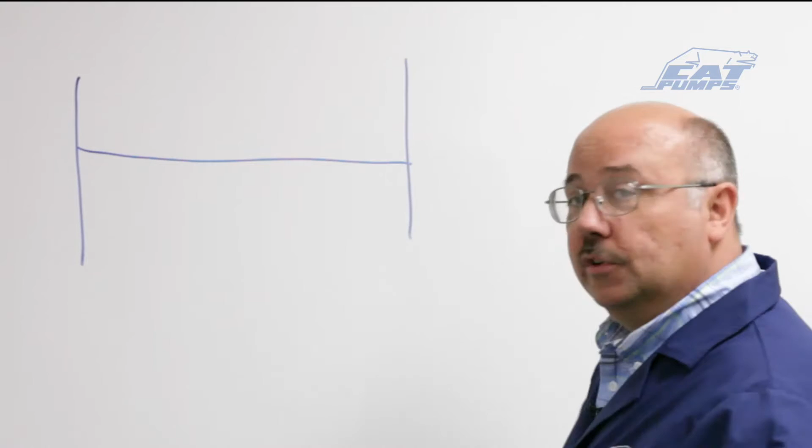Where do pulsations come from, and why do we need to dampen them? First, let's talk about where pulsations come from—they come from the nature of a triplex reciprocating pump. I'm going to draw a representation of one revolution of the pump crankshaft, going from 0 to 360 degrees, with 180 in the middle, marked every 60 degrees.

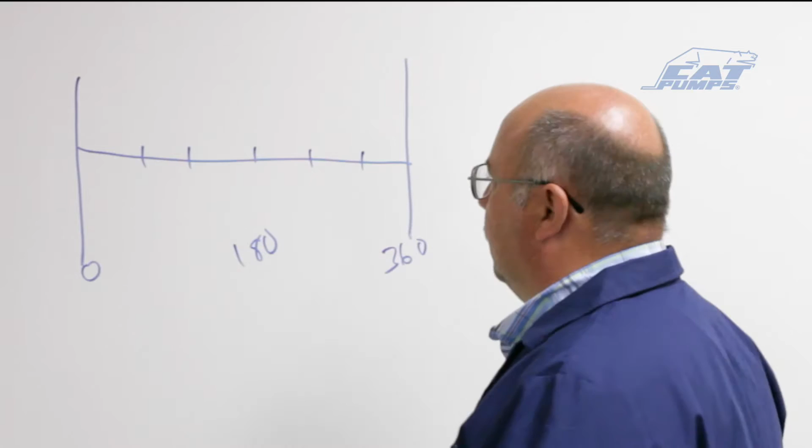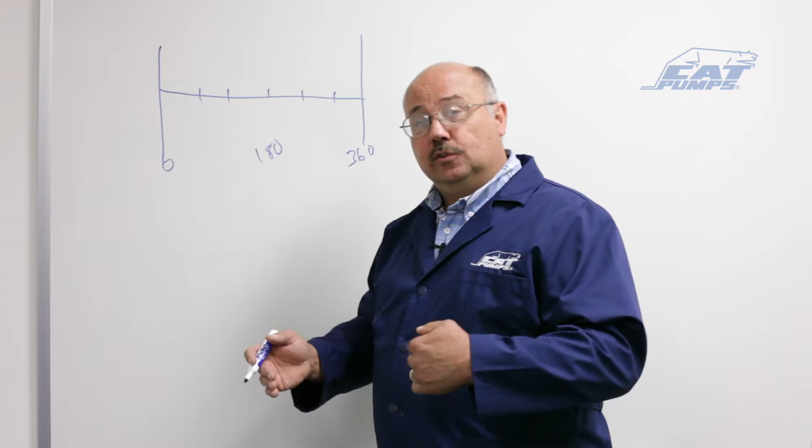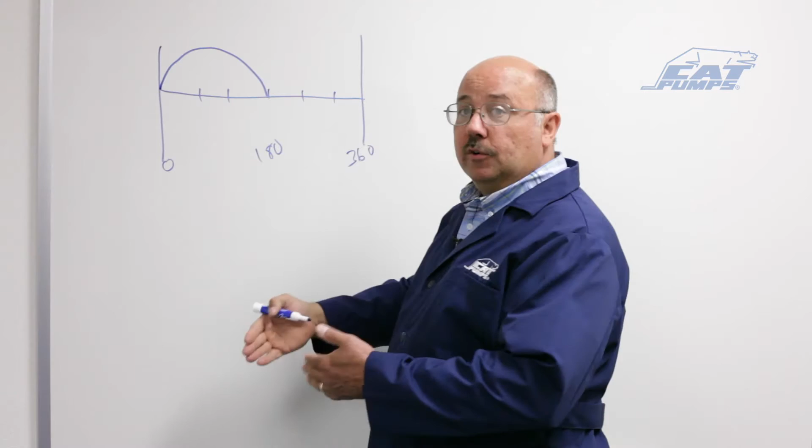Let's look at the first plunger. When a plunger starts out on a reciprocating pump, it's at 0 speed. Halfway through its forward stroke, it's at maximum speed, and at the end of its stroke, it's back at 0 speed. So the curve of the output will look like that. That's the forward part of the plunger—this is the return, where it's bringing fresh water into the chamber. We're only interested in the output of the pump in this scenario, so one plunger has output like that.

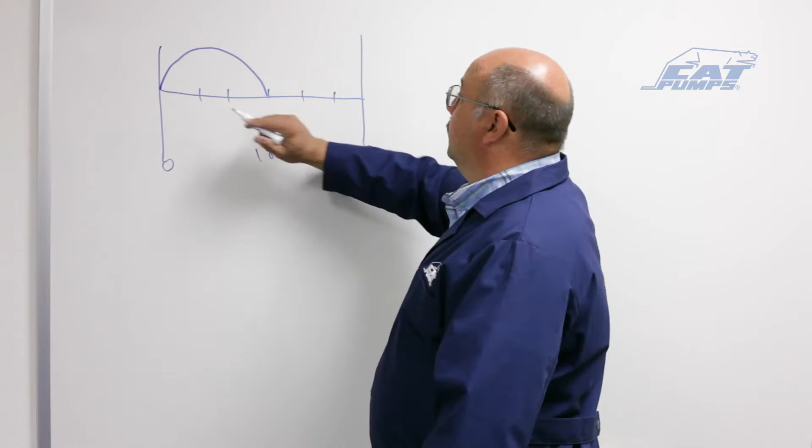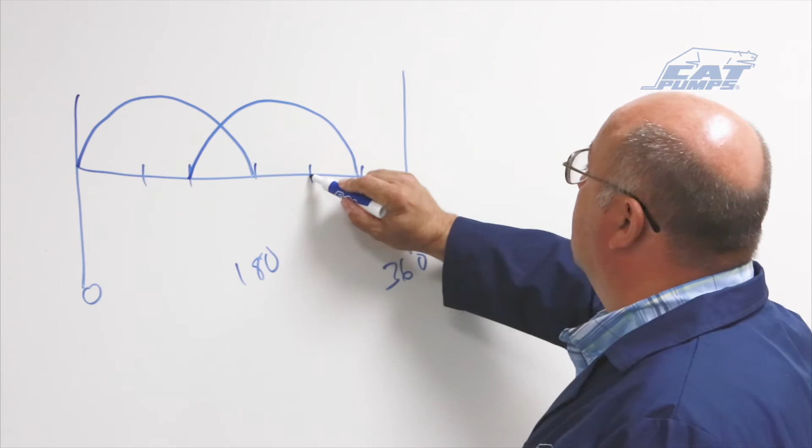Now let's look at the second plunger. It starts at 120 degrees offset and has a similar output. The third plunger starts 120 degrees after that, with a similar output as well. That's what the output of a reciprocating triplex pump looks like.

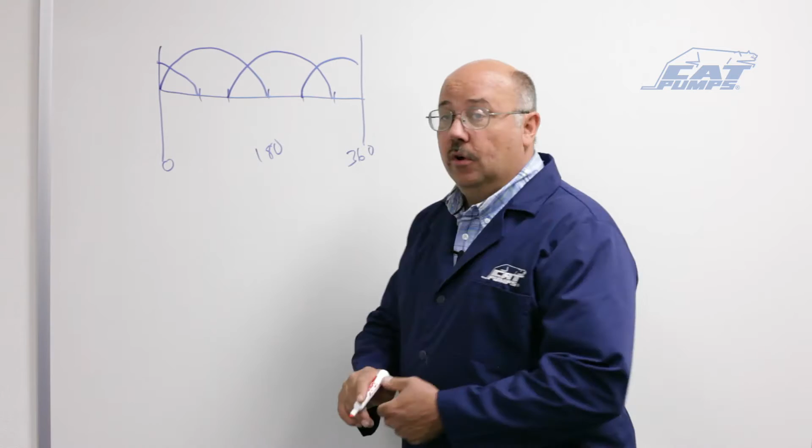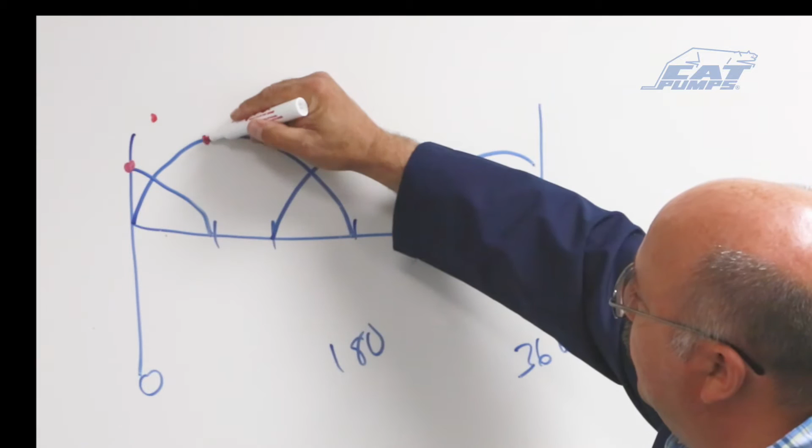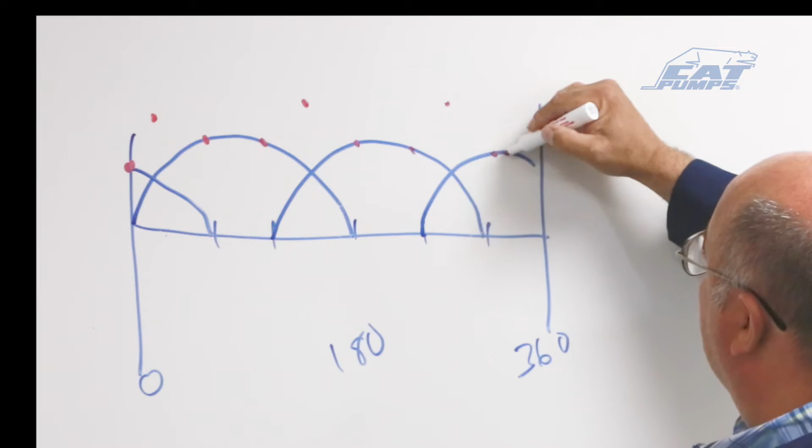Now, to get a true picture of what's happening, we add what's happening at each moment. At this point, only one plunger is going forward, so there's this output. At this point, two plungers are putting out the same amount, so we add those. Here, only one is putting out, so it follows this curve from there to there. Again here it adds, follows along, adds, and follows along—so the output of the pump actually looks like this.

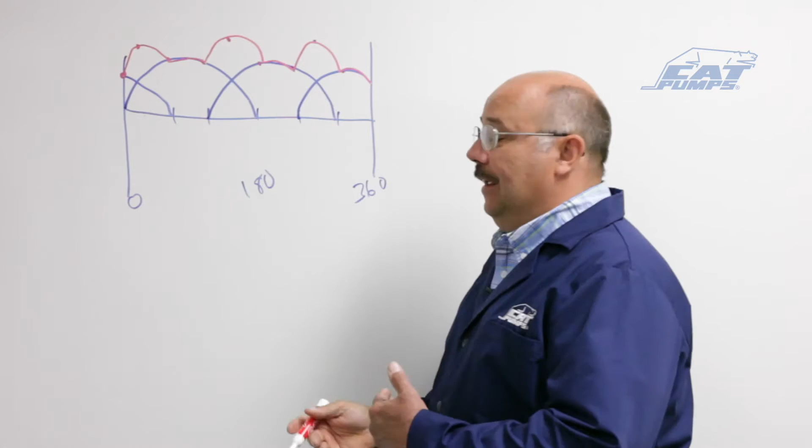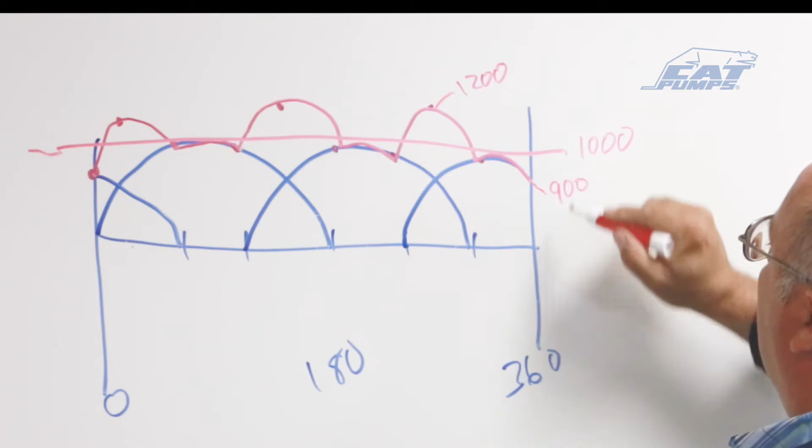As you can see, that is a pulsation curve. If we're running at 1,000 psi right through here, we're seeing peaks up here of possibly 1,200 and valleys down around 900 psi. So in one revolution of a pump, we have 3 peaks up to 1,200 and some valleys at 900 psi—that's very erratic pressure, and it also represents the flow coming out. It's very erratic, and what we want is something a lot more smooth coming out.

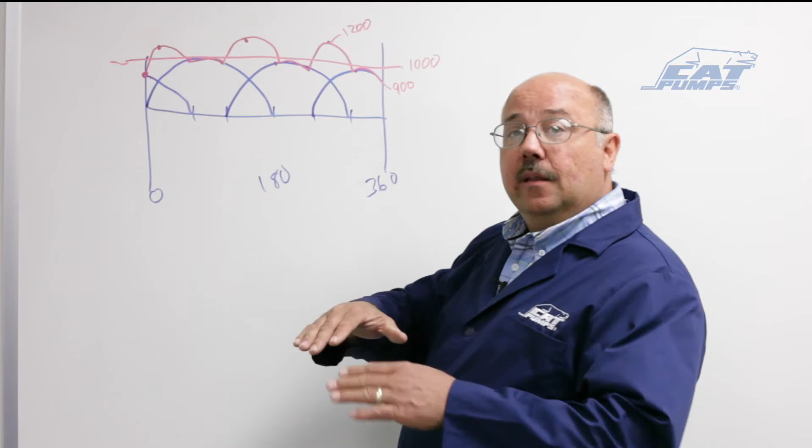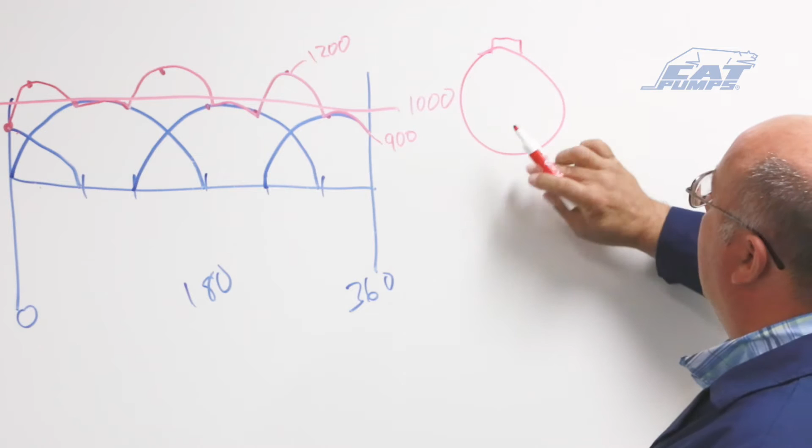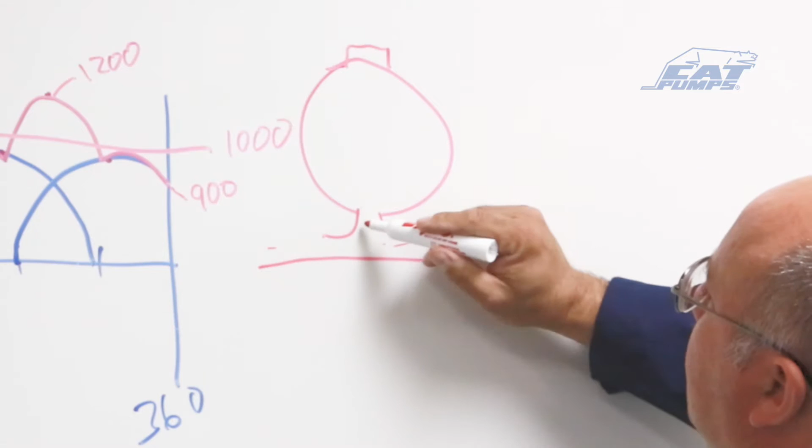So we introduce what we call a pulsation dampener. A pulsation dampener is basically a device that's spherical in shape, has a nitrogen charging cap, and is open at the bottom—we put it in line. So this pulsation coming from the pump travels through this piping and hits this dampener. The dampener will have a...

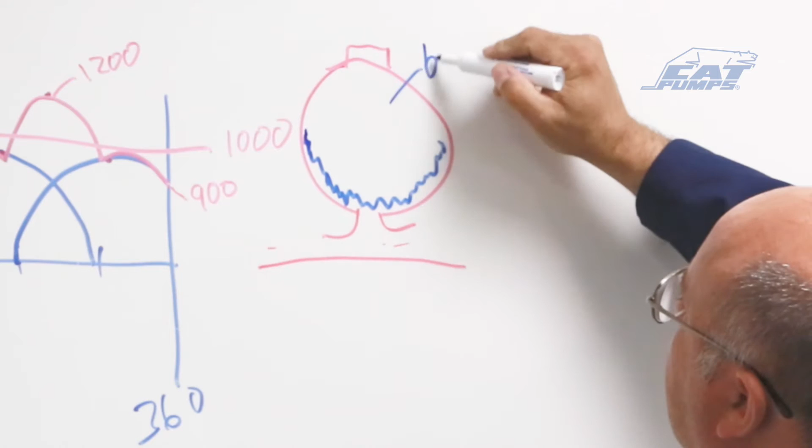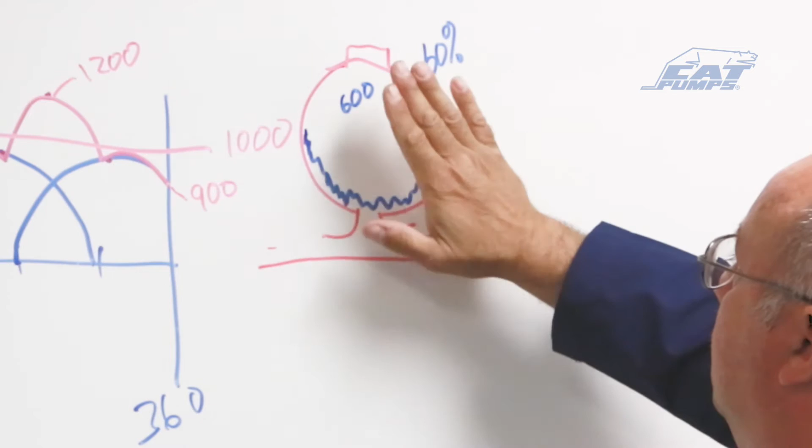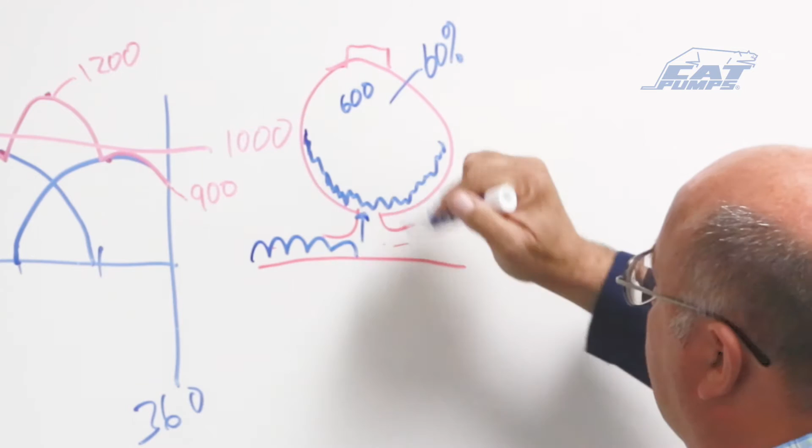...nitrogen-charged bladder in it at about 60% of operating pressure, or in this case 600 psi in here. When this pressure is in here, it holds the bladder to the bottom at 600 psi. Now we come in here with our 900 to 1200 psi ripple. It energizes here, pushes the bladder up to this position, so now we have 1,000 psi on both sides.

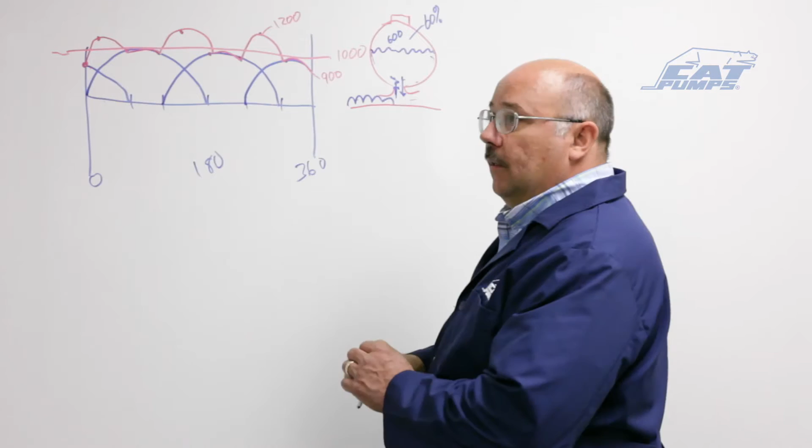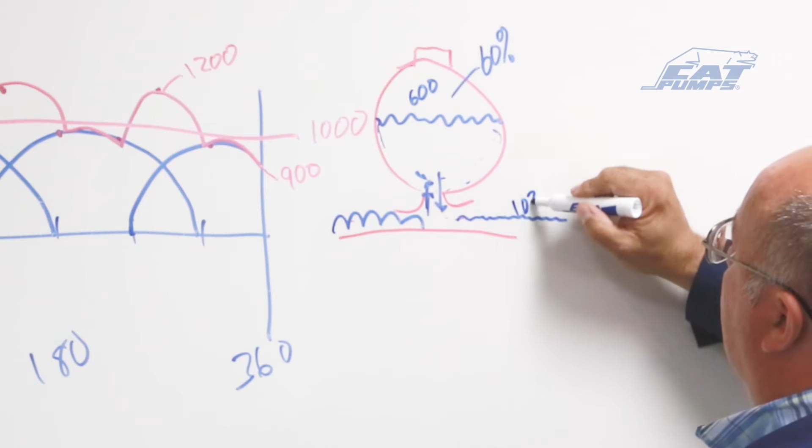This ripple is coming in and going out, and the bladder reacts to that—when a spike comes up, it goes up a little bit; when a valley comes in, it comes down a little bit. So it compensates this flow and gives you a much more smooth output, possibly a range from 1,030 and 970—a nice smooth ripple of flow. That's how a pulsation dampener works.

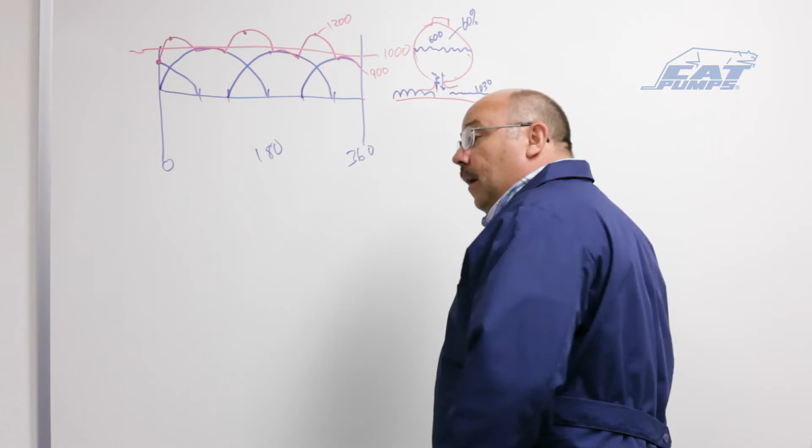Now, how do we put it into a system and what effects will it have on that? We're going to show—so I'll clear this.

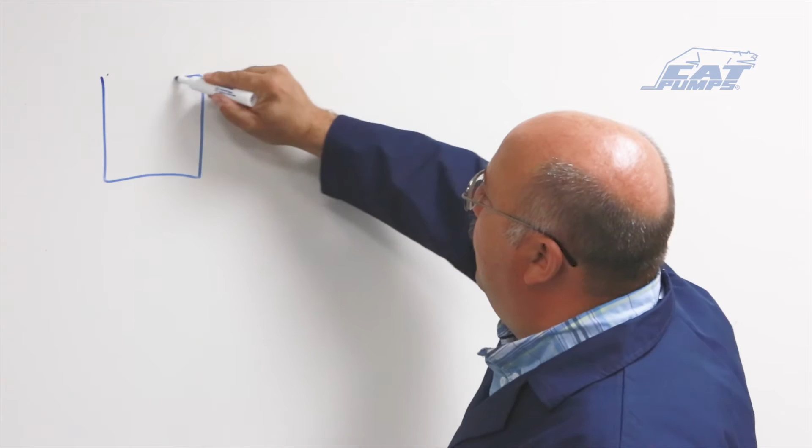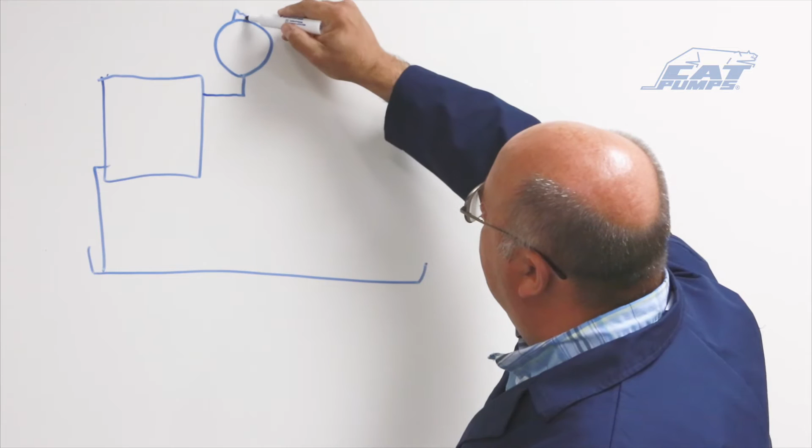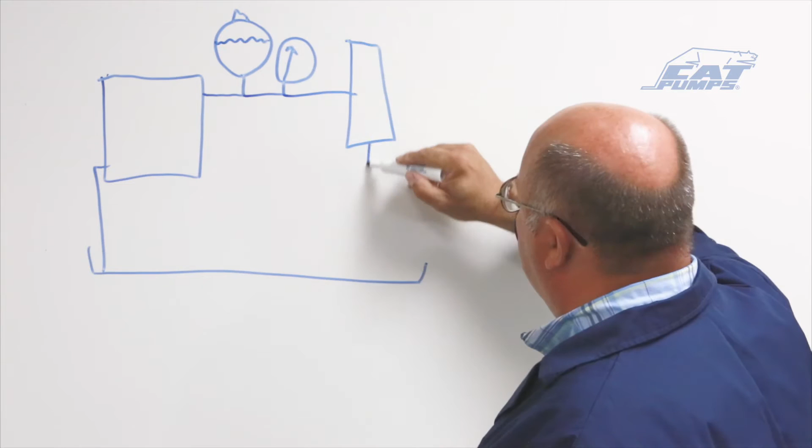We're going to draw a pump here that's drawing up out of a reservoir. The discharge piping is coming along, hits our dampener, with the pre-charge, and a lot of times there's a pressure gauge in your system, and we'll have to have an unloader valve in our system that bypasses back to tank, hose, trigger gun, and spray wand.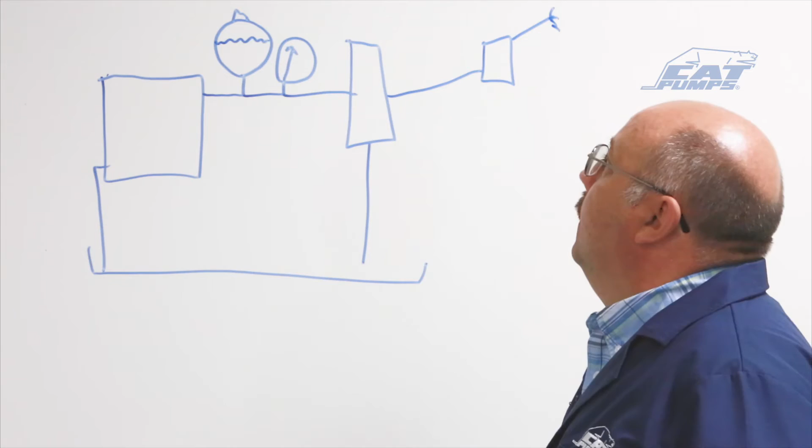This is what a typical system could look like with a pulsation dampener in it. So again, the water's being drawn out of the reservoir with the pump. It's putting out this rippled pressure. Now we got smooth pressure after the dampener, and what it does is the gauge, the unloader, the gun, the hose, everything is seeing the dampened pressure pulsations, so it's a lot smoother, and the regulator wouldn't be trying to react to this pressure wave.

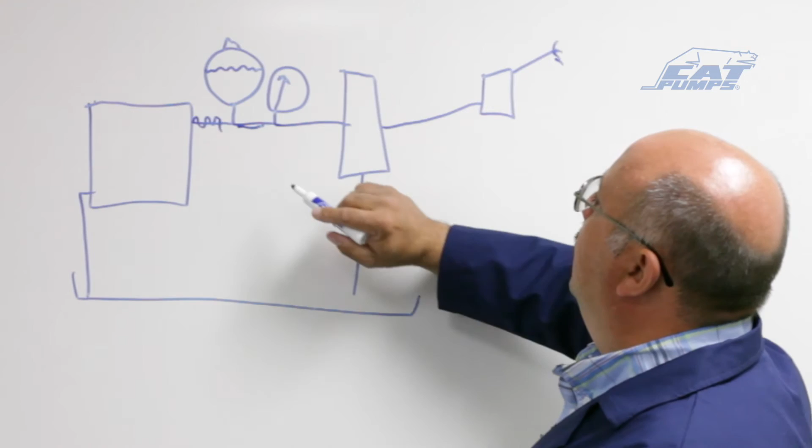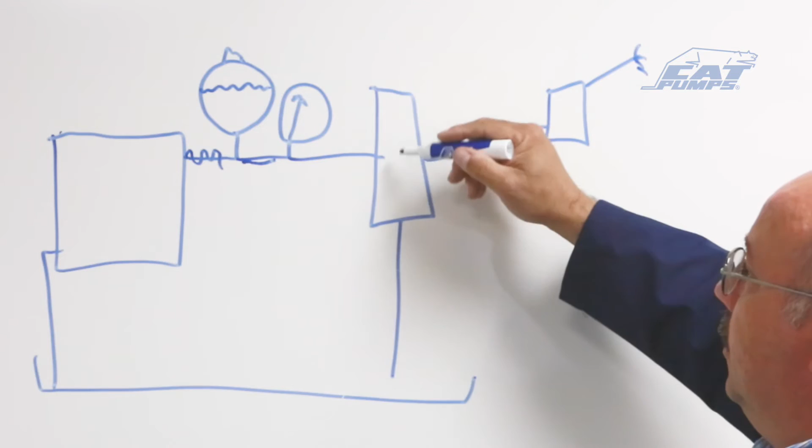If we take the dampener out, now we have the pressure wave getting to here, and the gauge is going to be vibrating more, the needle will be. The seals and piston in this unloader are going to be trying to compensate for this, so you get a lot better life out of your accessories and gun and hoses and fitting connections if the pressure is smooth as a result of putting a dampener in your system. And this is how this system can look.

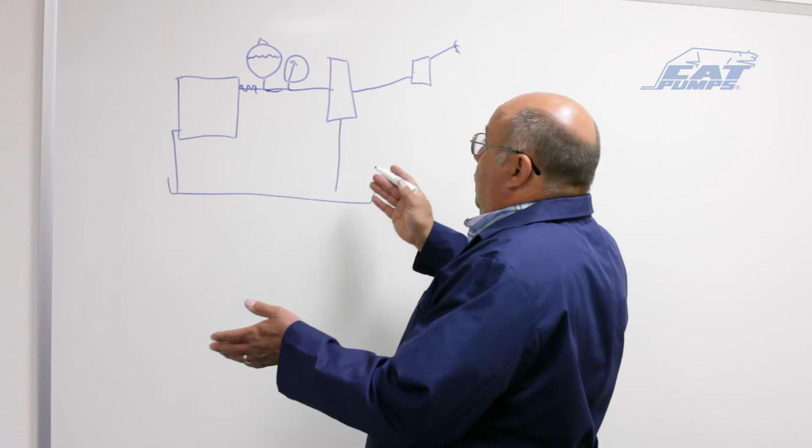Now, there are different ways to plumb them and things to watch for when using a dampener. The first thing to be cautioned at is you want this charged per the manufacturer recommendation, which is usually around 60%.

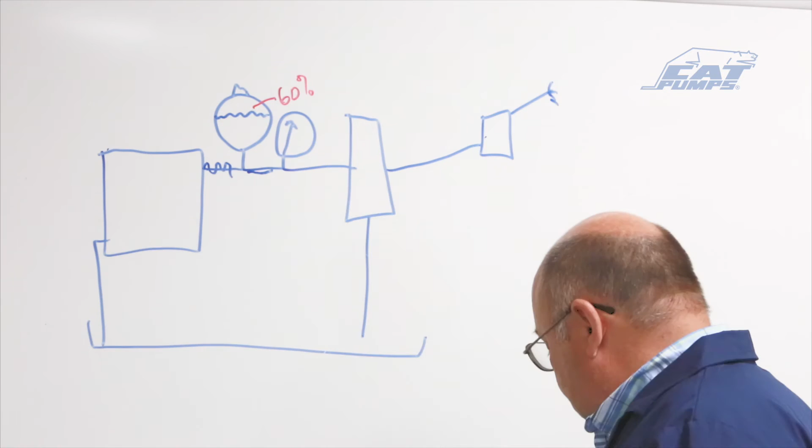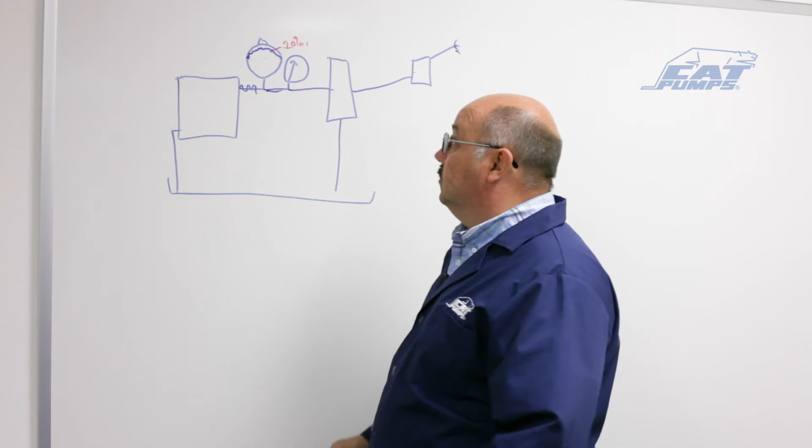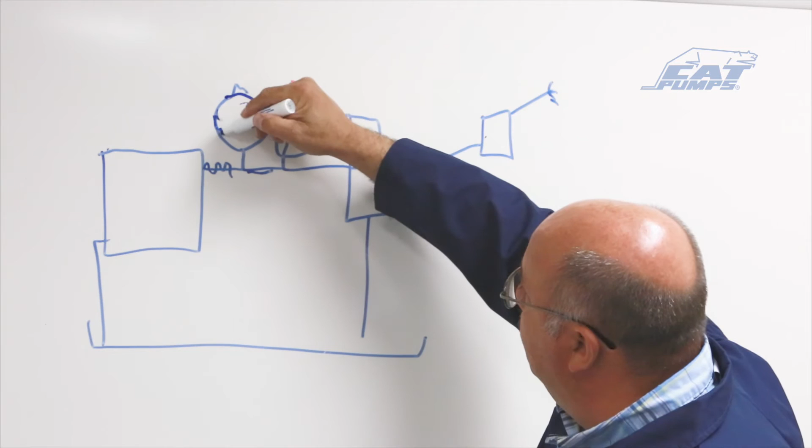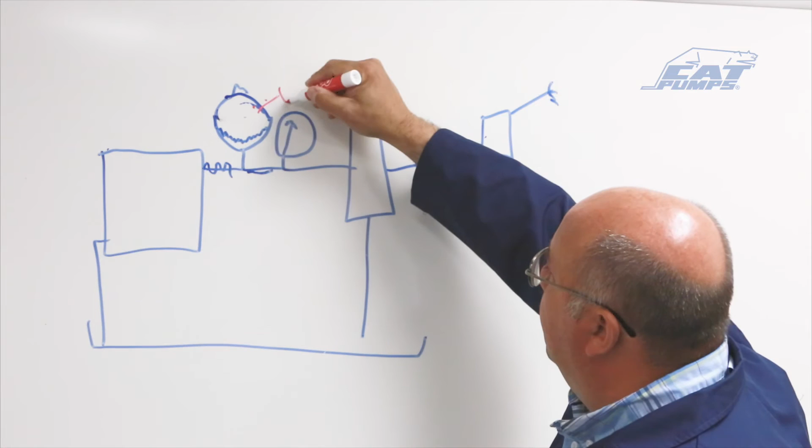Now, if we were to not do that and pre-charge it at, let's say, 20%, then the bladder, when it's in operation, will be deformed all the way up here and could lead to early bladder failure and fatigue. So then the dampener would lose its effect. If we were to charge it at 90%, then the bladder would only move to here during operation and would have very little effect in dampening the pulsations in your pressure line. So again, follow the manufacturer recommendations of approximately 60% pre-charge.

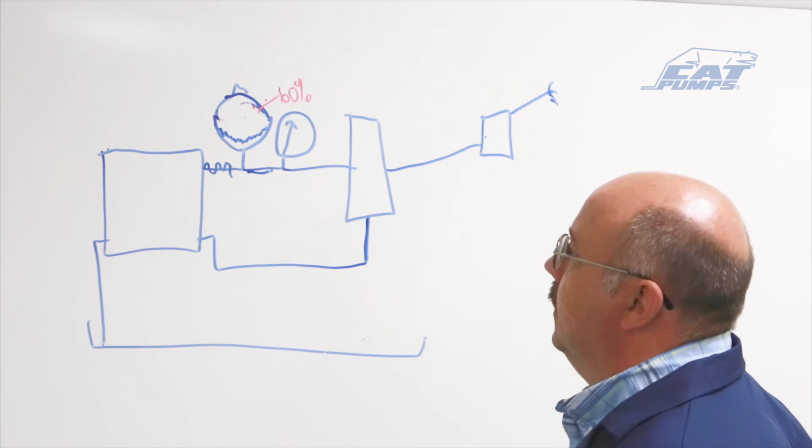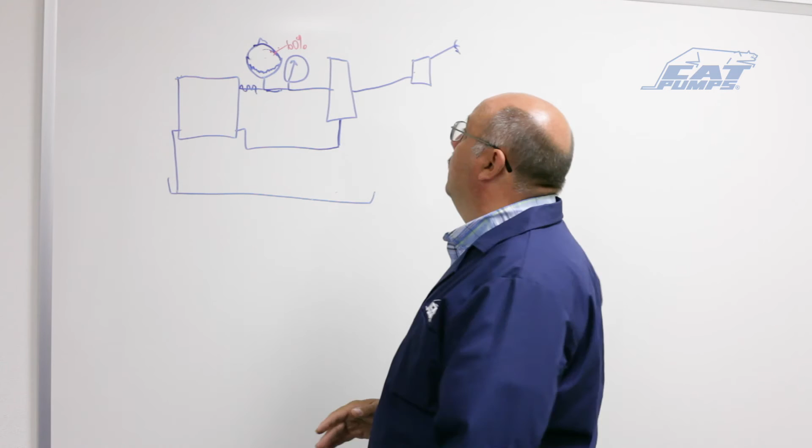This again is one way that it's plumbed into a system. Another way is this bypass line is sometimes routed back to the inlet of the pump so that when you shut the gun off, the water just circulates in this bypass loop rather than taking a second line all the way back to your tank. And this is, for the most part, a good way to do it.

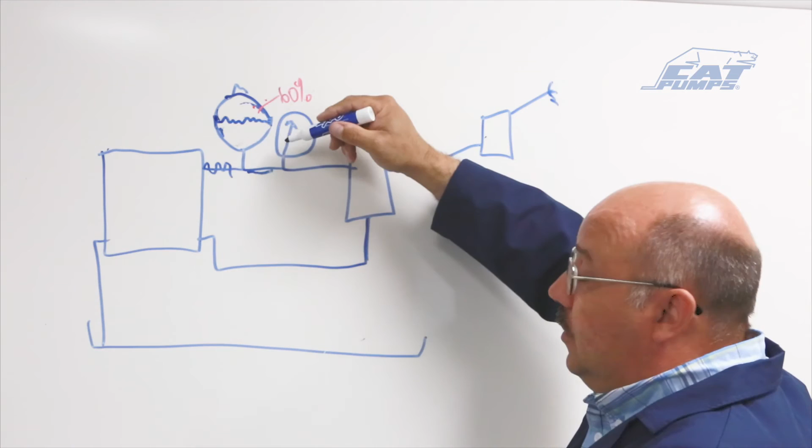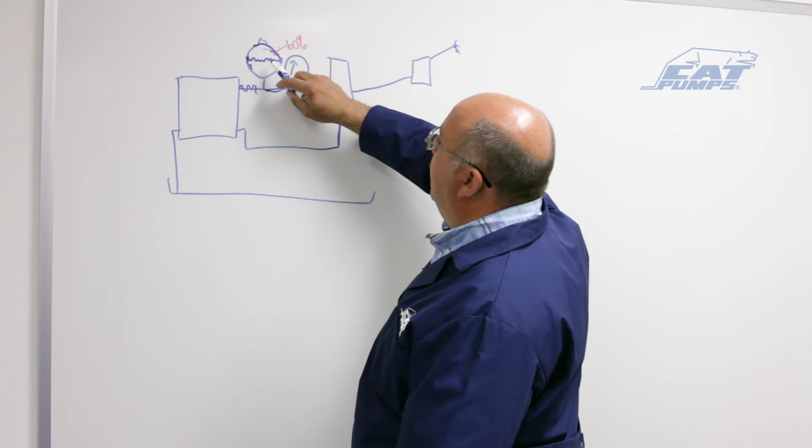Now, to remember is when this happens, when we were at 1,000 psi with the gun open and operating, there's a volume of water in this dampener that when we shut the gun off and it unloads, this volume of water escapes out of the dampener because the bladder will push down with the nitrogen charge and it'll empty the bladder or empty the dampener. So this flow then will add to this loop.

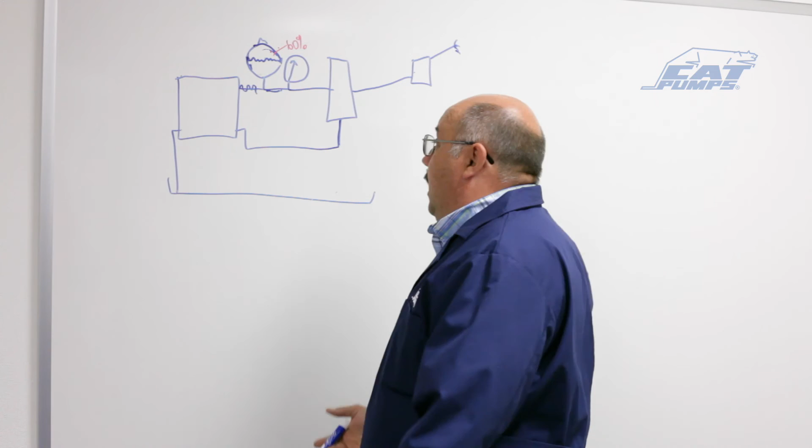Well, where is it going to go? You're adding a volume of water into a closed loop. Well, what happens is the extra volume of water will work its way through the pump and go back into your reservoir, which is okay. It causes a little bit of a pressure spike in this line, but not a lot.

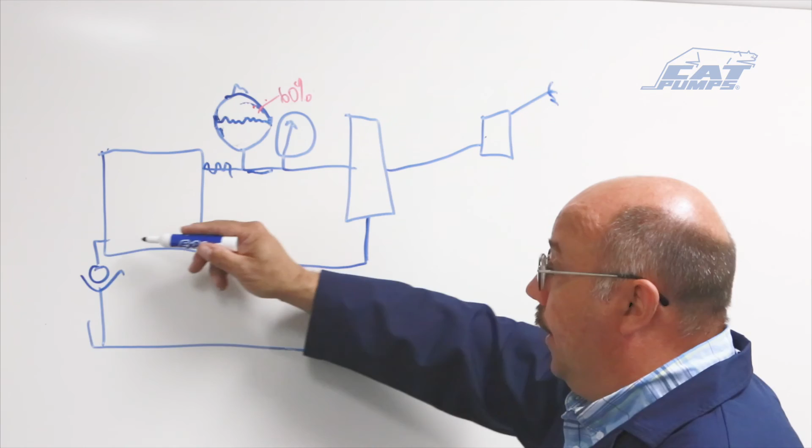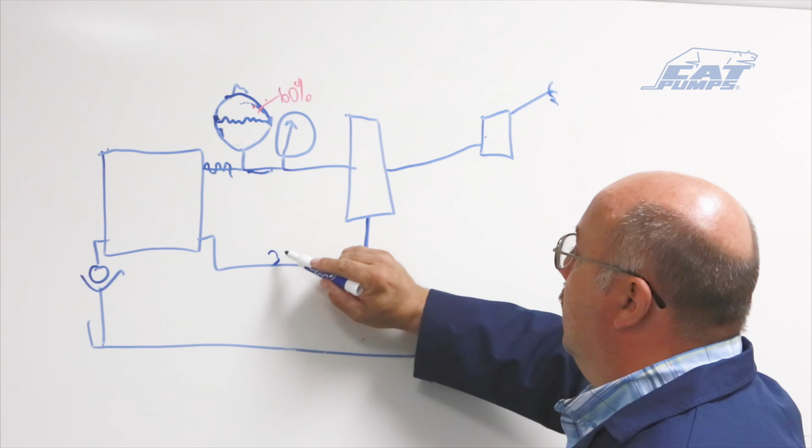But what can further happen is in the systems, sometimes there's regulations where you have to have a check valve here. Now this volume of water will get into this loop, but it has no way of escape. And water's not compressible, so what's going to happen is you're going to see an increase in pressure in this bypass line, maybe 300 to 400 psi. And if that happens, this pressure also goes through the inlet of your pump and can take out the low pressure seals and be very detrimental to the lines because usually these are low pressure lines.

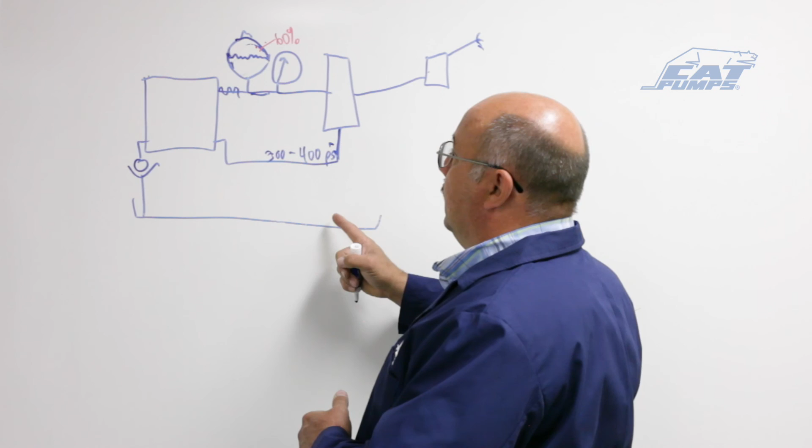And that is why we recommend following the two recommendations of bypassing back to tank whenever possible and keeping your pre-charge at the 60% manufacturer rating.